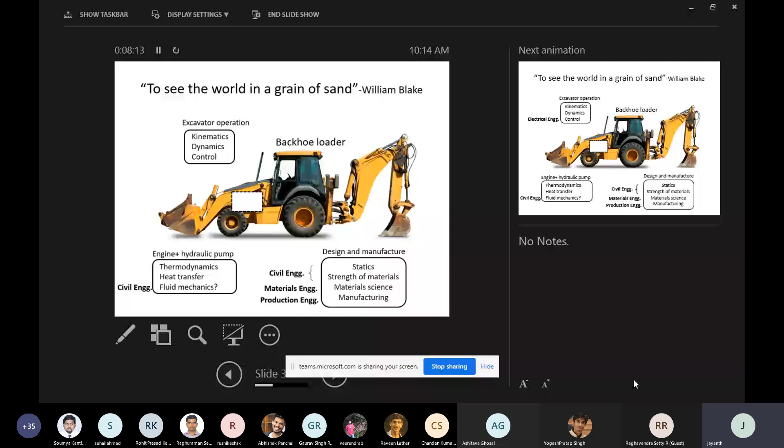And then there is material science, where you're going to face competition from material engineering students. And then manufacturing, where you're going to face competition from people who study production engineering. And in the top square, electrical engineers also learn controls, so they could also be potentially hired by an employer who wants to make a backhoe loader. But that leaves us with 4 topics which are not covered by any of our sister engineering disciplines. On the top you have kinematics and dynamics, which are hardcore mechanical engineering topics. And at the bottom, you have thermodynamics and heat transfer, again something heavily emphasized by the mechanical engineering curriculum, and you get a good grounding in it in your undergrad education.

So of these 2, which can provide you with unique advantages in terms of your employability? It is a little saddening for some of us to see that there is tremendous emphasis placed on the second 2 topics, thermodynamics and heat transfer, but not so much on dynamics and controls. So it is hoped that through your exposure to courses such as this one, this imbalance would be corrected ever so slightly, and you would come to recognize that knowledge of kinematics and dynamics can really be of use to you from the point of view of your employment, of putting food on the table. So what kinds of companies, what kinds of industries would hire a graduate who has expertise in kinematics, dynamics, and controls?

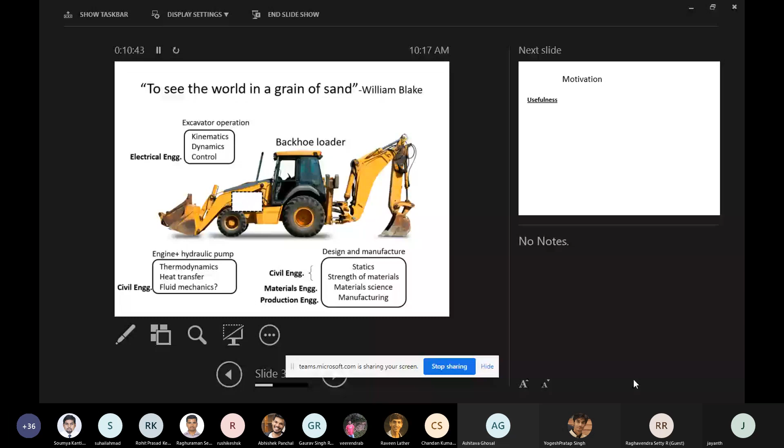So as far as usefulness is concerned, the first example that I have taken is...

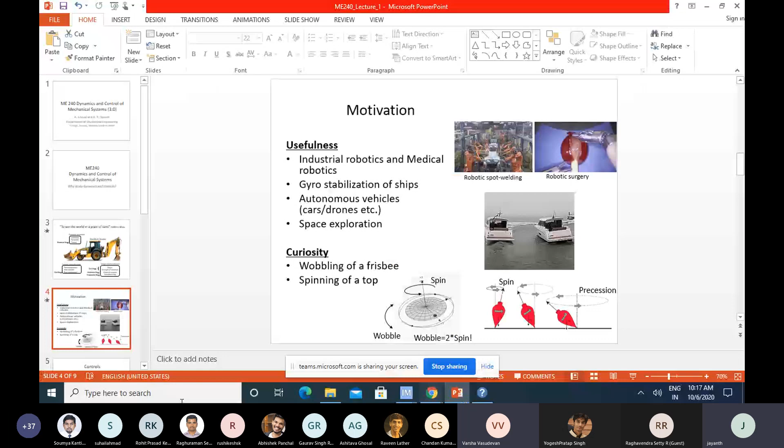Excuse me, sir. Yes. Could you put it in full slide mode? Pardon me. This is an executive mode, so we are seeing the next slide also on the side. I don't know how to. In the display settings on the top. Let me just try again. How do I get out of this? On the top there is display settings. Okay, yes, I see that. You can just use swap presenter view and slide. Presenter view, is that what I need to pick? Is this okay? Now you are seeing only whatever I wish to show you, right? Yes. Thank you. So I'll continue.

So in terms of usefulness, the first area, the industry that I've picked is robotics. Already robots are widely used in industries to do things that are either too boring for human beings to do or too dangerous for them to do. So on the left, you see a GIF file of robotic spot welding happening on an automotive shop floor.

And robots are also increasingly used to undertake tasks which require a lot of fineness and precision. So robotic surgery is what you see on the right. This is still a growing field, but it will grow much bigger. Human hands have jitter, they can shake about, so it's possible that you are not as precise in holding your forceps and tweezers during surgery as one might desire. Medical robots, however, solve that problem. You can very precisely position the end effectors and get them to undertake very fine operations.

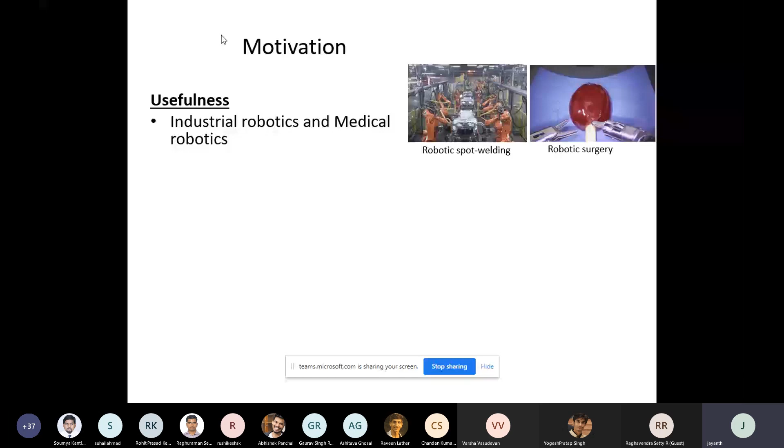A less glamorous application of dynamics and controls is in stabilization of ships. In this image on the right, I have shown two boats. The one on the left has a certain stabilizing device called a gyroscope installed in it. The one on the right, however, doesn't. And you can see the difference in the motion, and you can imagine the comfort levels that a person sitting inside one would have vis-a-vis someone sitting inside the other.

These are called anti-roll gyros. They prevent the boat from rocking about its longitudinal axis on account of the pressure variations it feels on the left side vis-a-vis the right side due to the waves it is riding underneath. This very cool device is something that we will look at in this course and see how we can design anti-roll gyros.

These are used also in huge ships, in luxury cruises and so on. By definition, a luxury cruise is supposed to be a pleasurable experience for its passengers, right? So they don't want this kind of rolling motion to give them seasickness. So anti-roll gyros are installed in such ships to be sure that the platform on which people put their foot and sit is stable and flat. They don't rock back and forth.

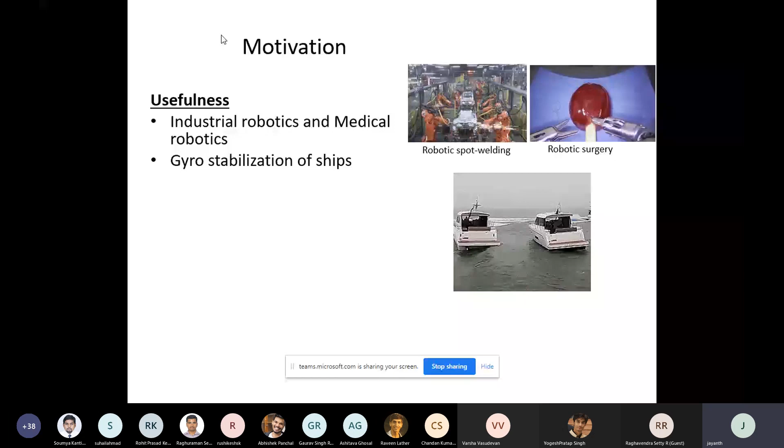So these are a couple of examples I have taken from the world as it exists now. As I said, dynamics is employed in anything that moves, so I have not taken other examples. But going forward, the 21st century is likely to be the century of autonomous vehicles. Just as the 20th century was a century of automobiles, at the turn of the 20th century, horse-driven carriages were replaced by cars.

Such carriages were not called cars to start with; they were instead called horseless carriages. Now already there is this talk of driverless cars, right? So driverless cars are in some sense analogous to horseless carriages. And over a period of time, I'm sure we'll coin a new name.

Just as we got rid of horseless carriages and called them cars, we shall get rid of driverless cars and call them something else, maybe a robotic taxi or whatever. And that's going to be the predominant mode of transport. Why is it so promising?

It's because statistics have shown that cars are stationary 98% of the time, believe it or not. So you just drive your car from point A to point B to get to wherever you're working, but then it just sits there till the evening, and then you drive it back, and it sits there back in your garage for the remainder of the night, all the way till next morning. So 98% of the time, a car is not in use.

Okay, so it can be put to better use if you don't have private cars, but instead taxis like Uber and so on, and you are able to use them on demand. So that's the future of transportation. And since each individual does not need to own cars and they can instead share these cars, the number of cars on the road is expected to come down by nearly 70%. So in order to design and develop these autonomous vehicles, you need to know dynamics and controls. And then we'll talk more about it sometime later.

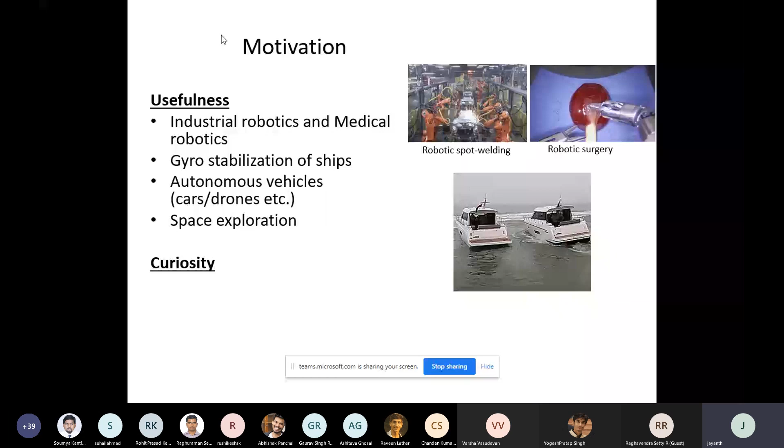And here I wish to give a couple of examples. So the first is a frisbee. So you have played with the frisbee when you were a child, or perhaps you continue to play with it now. A frisbee is nothing but a flying disc. Now it turns out that when you release a frisbee, I'm sure all of you have noticed it, it wobbles a little bit, and it also spins about its axis. So this wobbling is this slight up and down motion that the frisbee undertakes as it travels from point A to point B.

And then, of course, the way it is released from the side, you also end up imparting a certain spin to it. Did you know that to within maybe 1% or better, the frequency of spin is exactly half the frequency of wobble? So no matter how you release it, you cannot independently determine this wobbling frequency and the spinning frequency.

They are intimately connected. In fact, this equation that relates the two is something that we will discuss in this course. And this is a very neat fact. So regardless of how big the frisbee is and how you have released it, the wobbling frequency is exactly twice, almost exactly, within a few percent, exactly twice the spin frequency, no matter what. So this is a cool fact, and I was actually hooked when I learned it.

And it turns out that I was not the only one who was hooked. Someone far more eminent and capable than me. You must have heard of this physicist by name Richard Feynman. He is considered the father of nanotechnology. He won the Nobel Prize for his work on quantum electrodynamics and so on.

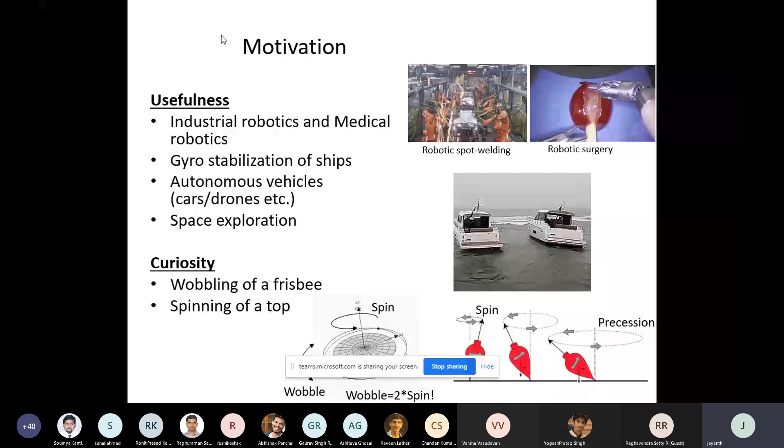The first problem that we will face is that we are not really sure what all forces act on these cars. We are not sure about the kind of friction that there would be between the road and the tire, especially on Indian roads, which can change in complexion from point A to point B. You could have potholes and exposed gravel at some points. You could have tarred asphalted roads on another. So there's so much uncertainty associated with the forces that act on the car. You don't know its inertia ahead of time. You don't know how many passengers you are carrying in this car.

So there is some uncertainty associated with the dynamic model of the car. And as I said, there are environmental uncertainties, in terms of air drag, and more importantly, on Indian roads, you have jaywalkers, people crossing the streets from all sides. So these can be treated as disturbances in some sense, in the sense that I will talk about later on in the course. So you have all these uncertainties that affect the functioning of a robotic car.

So you want it to travel from point A to point B with a certain velocity waveform. You want it to accelerate to 60 kilometers per hour and travel at that uniform speed and so on. You're going to end up in jail, right? So you're going to have people crossing the street at all sorts of random times, and you're going to have uncertainty. You cannot accelerate the same way with 4 passengers in your car vis-a-vis having just a single passenger. You cannot accelerate when you have a very muddy and uneven road as what you would do when you have a very smooth flat road, etc., etc.

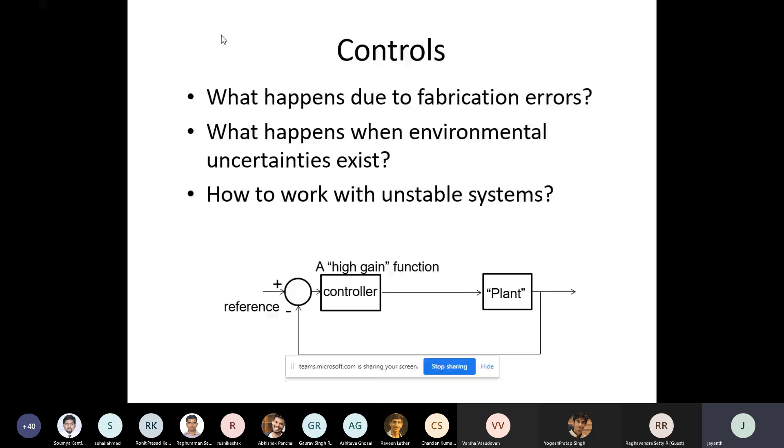The first 1 month would be devoted to rigid body dynamics in 3 dimensions. So in your undergrad education, we assume that you have seen rigid body kinematics and rigid body dynamics, but only in 2 dimensions. You may also have learned a little bit of rigid body dynamics in 3 dimensions. So this content, to some extent, acts as a bridge between stuff that you have already come across in your undergrad and stuff that we would be discussing in greater detail later on in this course.

So here I would start off by talking about kinematic relationships and representation of orientation of a rigid body. So this is the first problem that we need to confront and address. How do we represent the orientation of a rigid body in relation to an inertial coordinate system, in relation to Earth, for instance? And in this context, we introduce what are known as rotation matrices.

And to capture the essentials of a rotation matrix, which is an abstract mathematical entity, we use more down to earth and easily understandable language, and that's the language of Euler angles. So we represent rotation matrices by means of Euler angles. So representation of orientation is the first and the most important thing in relation to understanding rigid body dynamics. So that's the first thing that we would learn, and that's followed by the laws of motion.

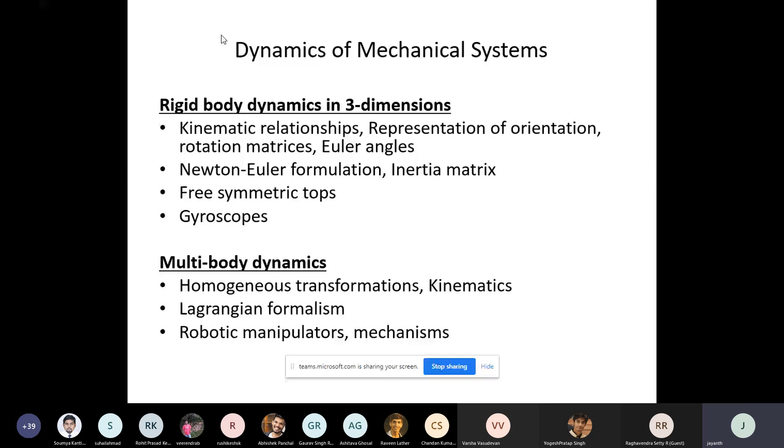And we will take examples of robotic manipulators and other mechanisms for applying the Lagrangian formalism and obtaining the equations of motion. Once you have the equations of motion, you need to solve them. And what you would discover is that they are in general nonlinear ordinary differential equations, and therefore it's not possible in general to solve them by hand. So the last part of this module would talk about numerical techniques to solve the equations of motion. At this point we will have the midterm.

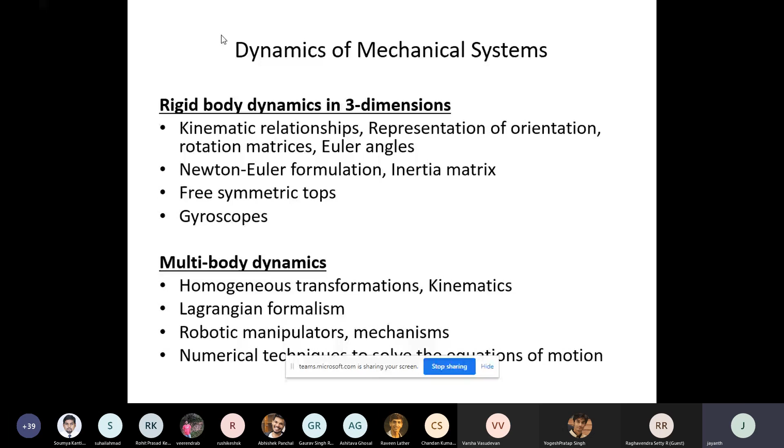Then we will proceed to feedback control. Feedback control again has two modules. Traditionally, if you look from a chronological perspective at the development of control systems, they were all developed in the frequency domain. By frequency here, I mean you need to recollect how you can represent a periodic signal in terms of sinusoids and so on, as you can do by using the Fourier series. An extension of that is Fourier transforms, which allows you to represent aperiodic signals in terms of a continuum of frequencies and things like that.

These notions were intimately linked with the development of telephony and so on in the early parts of the 20th century. This was a tool that was used most widely by the pioneers in control theory. And so we will probably take this same chronological approach to introducing control systems here. These are very intuitive, easy to use tools, and they all depend on us knowing a few mathematical techniques, in particular Laplace transforms, maybe a little bit of Fourier transforms, and then this notion of transfer functions.

Then we'll introduce these techniques for design and analysis of control systems in the frequency domain, using the transfer functions of these dynamic systems, and they include Nyquist plots, Bode plots, and root locus. And then we will discuss briefly feedback systems. We won't have too much time. Design of feedback systems is a very big topic in itself. We will briefly introduce how one would go about undertaking the design in the frequency domain.

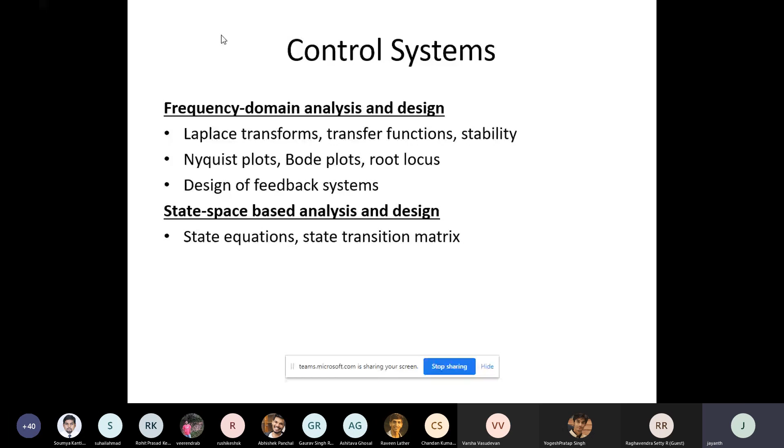And then we talk about how we can modify the dynamics of this system by using this technique called pole placement. And this technique, for it to be practical, imposes some demands on the mathematical structure of the equations that govern this dynamic system's behavior. And two concepts in connection with that are controllability and observability.

So we will introduce these two concepts, and then we will talk about design of state observers in case some of the states cannot be observed experimentally, and then we will conclude this module as well. So this is as far as the course content is concerned.

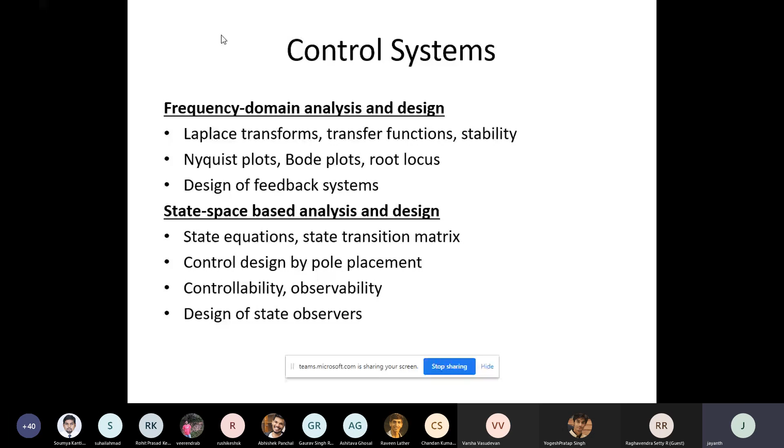Maybe at this point I can take some questions if there are any, before I talk about the grading structure and so on for this course. Are there any questions? Okay, I don't see any questions from the students. So I shall now move on to the grading structure.

So there will be about 10 homeworks, and the cumulative weightage for homeworks is 20%. So that amounts to about 2 points per homework. Each homework would be connected with the previous or upcoming class material fairly closely, and would often include problems that require MATLAB programming. So when you think of the weightage for the homeworks, it's just 2 points per homework, right?

So you would probably think that these 2 points are not a big deal, but believe me, these 2 points are far more important than what you might intuitively imagine them to be, because these 2 points, if you are able to gain them, will set the stage for you earning the remaining points in the midterms and the examinations.

So if you are not sincere in solving the problems that are given in the homework... these problems may not be very tough, but they help to refresh some of the concepts that would be taught in the previous lectures, and sometimes help build familiarity with the concepts that I would be introducing in the next few lectures. So doing the homeworks, therefore, prepares proper ground for you to closely follow the material that I would be teaching.

And there will be 2 midterms. Each of them has 25% weightage, and then there will be one final examination, which is weighted 30%. Now, usually we have these arguments around the time of the first midterm as to when exactly to schedule it. So whenever I bring up this matter of fixing the date, students will complain about how it clashes with some other presentation, some other midterm, some other commitment that they would have on that particular date, and we can rarely ever come to a consensus on an appropriate date.

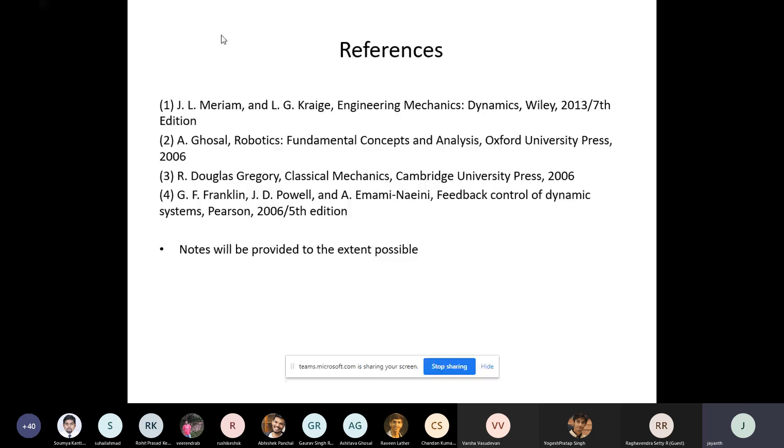I don't know if Professor Ghosal has something to add to whatever I have said here. Maybe if he wishes to do so, he can. No, I have nothing to add. Thank you, Jayanth. So I will be online. I'm not teaching, but I want to also learn what Jayanth is teaching. So I will be most of the time online. Yeah, if there is some particular question, if you still want to discuss with me other than Yogesh or Jayanth, then you can email me. Thank you. Thank you, Professor Ghosal.

So it's about 11 now, 10:55. So we have another 35 minutes of time. So there's one question from Dinesh Agrawal. Dinesh, yes, kindly go ahead. Good morning, sir. Good morning. Sir, regarding MATLAB and all, sir, we don't know actually. We never use this MATLAB. In homework and all, we are outside. We are not in the campus. How we can learn all these things, MATLAB and all?

So MATLAB, the licenses are available from IISc. So you can log in, and you can use VPN to connect to IISc servers, and from that you can download that software. And given the fact that you have told me that you are not familiar with MATLAB, we shall do it in a stage-wise manner. We'll first share with you some example problems that can be solved. How would you code for those problems using MATLAB? So we will make sure that you are able to do it in a stepwise manner, so that when you are taking on more difficult problems, you're already familiar with some of the common MATLAB commands, and you would be able to solve the problems.

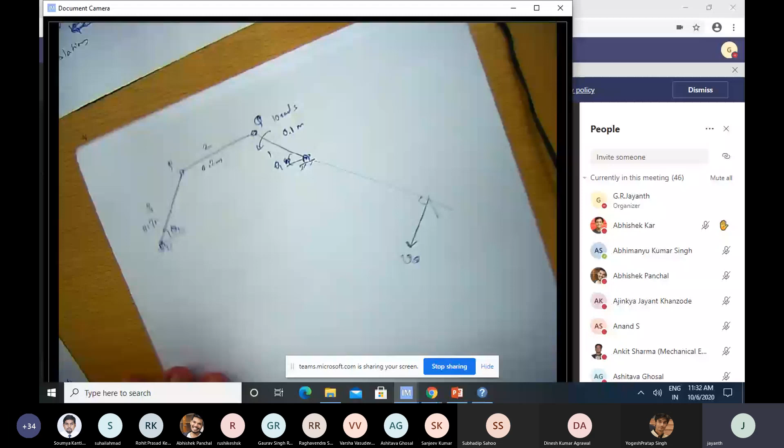So I can do this graphically. If this radius vector is like this, I draw a line perpendicular to it at 90 degrees, and this vector represents the velocity of the point Q. Now, in this schematic, the line PQ is shown to be horizontal. So the velocity of the point P will be equal to velocity of the point Q plus omega 2 cross QP, and omega 2 cross QP has to be perpendicular to both omega 2 and QP. Omega 2 is of course out of the plane of the paper because it's a planar mechanism.

QP, however, is horizontal. So therefore, the term omega cross QP, we don't know its value. We know QP, but we don't know omega 2. We know its direction, however. It has to be perpendicular to QP, and therefore it has to be along this vertical line.

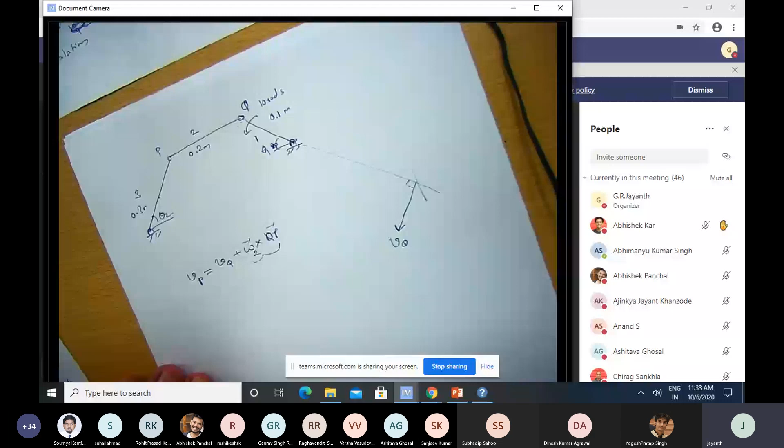Okay. So this expression Vp is equal to Vq plus omega 2 cross QP indicates that if Vq is like this and omega 2 cross QP is some other line like this, the two vectors should add up to give me Vp. This is how that vector diagram should look. Now this exact geometric analysis reveals that omega 2 cross QP should be along a vertical line. Okay.

Similarly, the point P is also independently a point on the third rigid body, and therefore the third rigid body rotates about this other hinge here, and therefore the velocity of that point P should be perpendicular to this radius vector as well. So I shall roughly draw that as well. I shall draw a straight line which is perpendicular to, let me call this OPQR. This is perpendicular to OP.

So this dotted line is the line along which the point P has to lie, because it's also part of the third rigid body. The velocity of the point P has to lie on this vertical line because it's part of the second rigid body and has to obey this equation. And it also has to lie on the third rigid body because it also has to obey this equation, OP. So as a consequence, the intersection of the two lines is where it will lie.

So this will be the velocity Vp, and this will be the velocity of P relative to Q. In other words, this will be omega 2 cross QP. So we know from geometry that this angle has to be theta1, that angle has to be theta2, and therefore we get the expressions for Vp and Vq by looking at this triangle. We know Vq, and that's equal to 1 meter per second. The magnitude is known, the orientation is known. We can use that to solve for everything else.